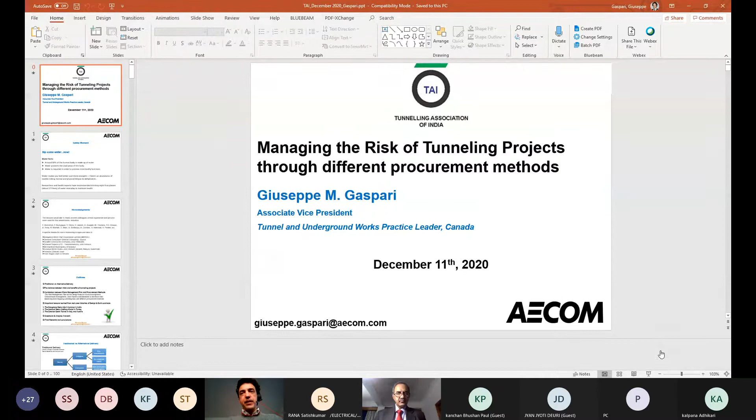Hello everyone. Here is Giuseppe Gaspari speaking from Canada. Can everybody see my screen first of all? Yes, it's visible, sir. Perfect. So I'll move to full screen.

First of all, I want to thank the Tunneling Association of India for inviting me, and in particular the president and the vice president, and my good friend Sandeep, who is leading the young members, for inviting me. I want to thank Mr. Devendra very much for still thinking of me as a young member. I am also closer to 40 years older than the threshold limit for young members, but I look young, so I think it is a great compliment. Thanks for that. You're very young. Looking at me, I've already crossed 60. So in fact, you're very young. Thank you.

I would like to get this training session started with the safety moment that is common for us here in North America. My safety moment for today is that of sipping some water, so I'm going to have a glass of water all the way through this workshop. I would gently request that every one of you remember with this safety moment the importance of drinking water. We're now working from home, most of us, all over the world, and sometimes we are so concentrated on our work that we stay at our desk for many hours and forget to sip some water.

Everybody knows how important water is. Our body is made mostly of water, and it makes us feel better, more energetic. Research experts say that 2.5 liters is what we should need every day to maintain our health. So we're going to go through the presentation, and sometimes I'm going to stop and request everybody to sip some water, as I will do as well.

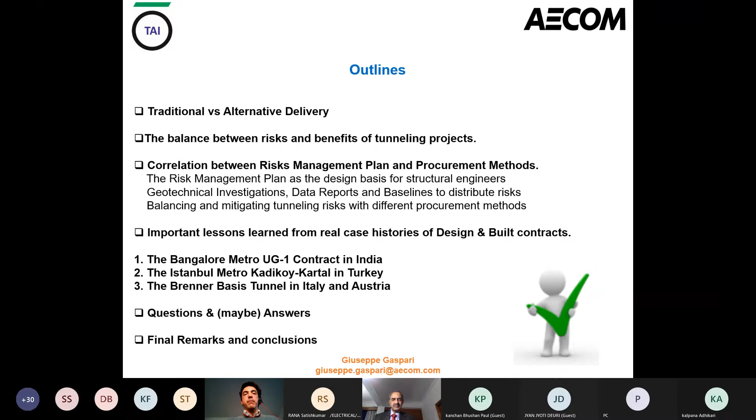I'm going to have some lessons learned from case histories. The case histories you will see through the presentation are coming from the Bangalore Metro Underground Contract 1, which has been completed and is now operational - the north-south line in Bangalore. I will speak about Istanbul Metro, Kadıköy-Kartal, a 30-kilometer long subway on the Asian side of Istanbul, and then about the Brenner Base Tunnel, the longest tunnel in the world, connecting Italy and Austria, currently being built. We're going to have some questions and answers and final remarks.

Now, to get started, let's set a little bit of ground rules here. What we usually globally intend for traditional delivery is the one where the owner of an asset, when deciding to move into a tunneling contract, establishes two different separate types of contracts: one with a designer and one with a contractor. In Europe as well as Asia this is not very popular, but in North America it is, as well as in the UK. The owner has all of the responsibility for the geotechnical investigation and for the preliminary and detailed design, up to the very issue for construction drawings.

This is why the designer that is in direct contact with the owner often has a number of subs, either consultants or those subs developing the geotechnical investigation program. A separate contract, once the design is completed, is then established between the owner and the contractor. The contractor may still have some subcontractor or sub-consultant as designer, but he's the only entity having a contract directly with the owner.

When we move into alternative delivery, we used to speak about different types of forms of contract: design and build, very popular in India, and P3, for example, which are more and more growing everywhere globally, or other alternative deliveries that I'm going to speak about in a little while.

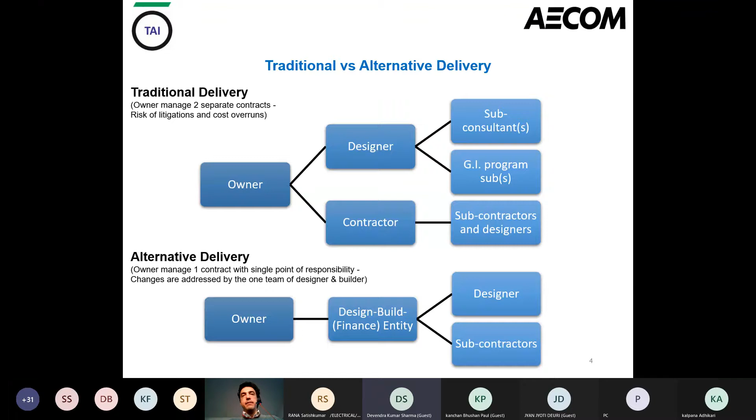This type of relationship is, as you see, easier somehow, more direct, and has a direct relationship between the owner and who builds the asset, which is the design-build, sometimes financing entity. This design-build entity is then constituted by designer or designers and subcontractors specialized in doing other tunneling operations or station constructions, ventilation systems, whatever it's needed. But the one thing that is different between traditional and alternative delivery is this either dual or unique type of contract relationship with different entities designing and building the contract.

Now, what is the difference in terms of schedule within the two methods? We are all acquainted with the design-build method. I myself delivered a few projects in India with the design-build method, and it is quite efficient. It is confirmed globally that we have an average time saving of about 33% and average cost saving of about 6%.

This is because the whole schedule is quite concentrated within an initial quick planning, but then the preliminary and final design take place as the estimation and bid from the contractor participating in the tender phase develops, and the permit acquisition doesn't have to wait for the completion of the final design but will start earlier in the game, so that construction can actually commence about 30% times earlier than what happens with the design-bid-build method.

The design-bid-build method is very popular in some countries in Europe and in North America. It is more linear, and as you see, allows the owner to have full control over the whole process. We have a preliminary design followed by final design, then a cost estimate, then we go out to bid, and the bid is only for construction. Once we have the awarded contractor, he will get the permits done, and finally the selected contractor will go into the site and get the construction done.

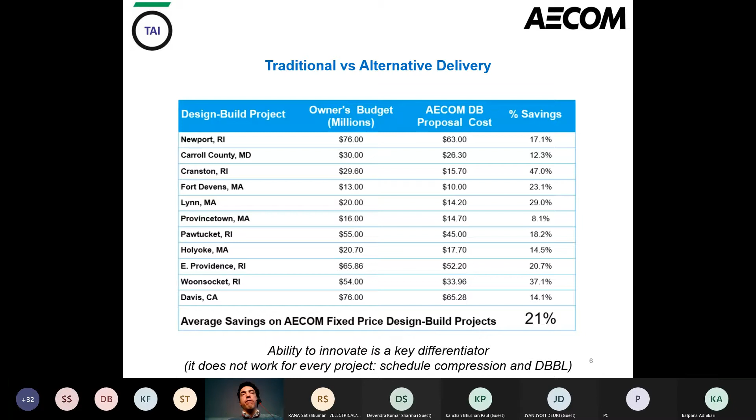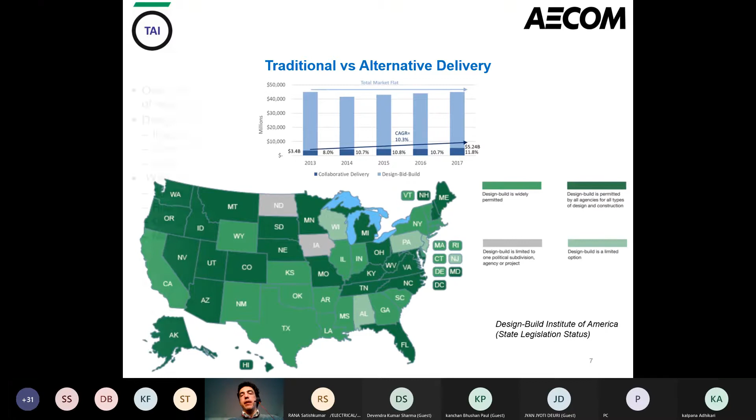Now, what is the advantage here, and why do we move to design and build over design bid build? Really, it's having one contract between the owner and the design builder as a single point of responsibility. And that one point of accountability is what allows the legal framework to be much easier. Now, the design builder can take many forms. We can either have an integrated design build firm with all services in-house, including construction and design, or we can have a joint venture, or we can have a contractor hiring an engineer.

But who is taking the lead here? And that's what is really important to understand, even when we are experiencing design and build contracts, because proven ability to deliver a certain type of project is what really matters. I've seen several times in my lifetime contracts being assigned and being led by entities who were not really experienced in tunneling. When we speak about tunnels, we want to have as the lead the team member who has more experience and more ability to deliver a tunnel, even though it may not be the strongest of the financial partners in the joint venture. And that is a first critical message to deliver in this presentation.

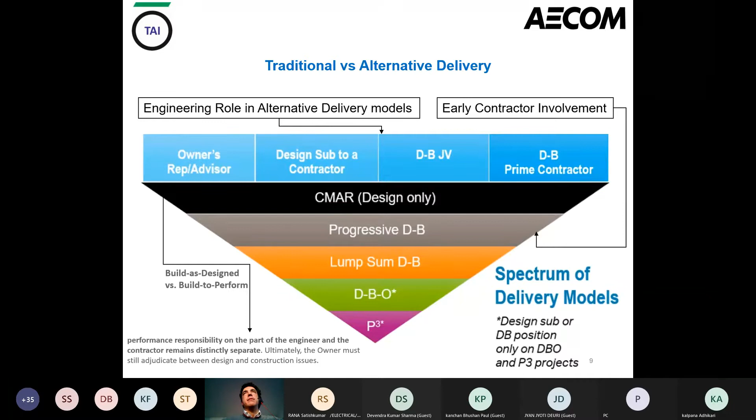So in these cases, we have a direct intervention of the public, partly financing the works, but the private entity will actually have full responsibility of geotechnical investigation, design, construction, maintenance, and operations for an amount of years which is directly proportional to the investment that the public is developing.

Now, I hope this made a little bit more clear the distinguishing of different types of alternative contracts and what really is the reason why we don't move alternative delivery in North America while somewhere else in the world, such as in the Indian area, we have a lot more accomplished with this design form. Well, first of all is the fact that many states, as I say, don't have a proper legislation to allow that. There is also sometimes a lack of ability in selecting the design builder based on qualification and experience, just because there are not many competitors locally, perhaps, that can deliver a tunnel.

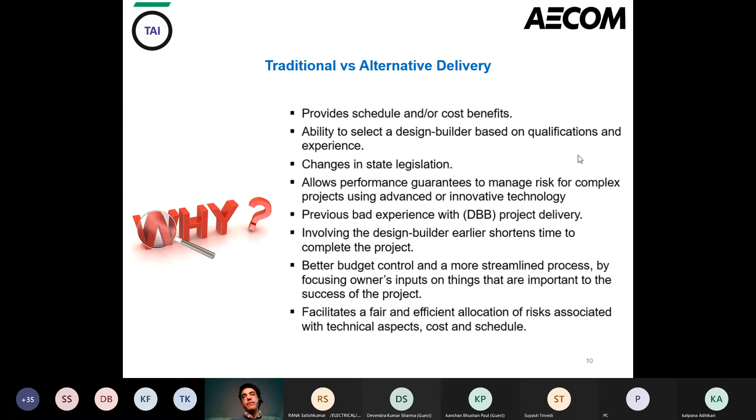And that's why we're seeing, particularly in Canada, a lot of contractors and companies coming from abroad, from Europe, from Asia, coming in and bringing their experiences and qualifications on projects that maybe is the first time that they have been built in such a way in Canada or the US. Now, what is also critical is that the involvement of design and builder earlier kind of shortens the time to complete the project, but also opens to a number of liabilities that very often the owners are not ready to take on.

Now, that's the time for a sip of water. And I wanted to make polls, but we won't have the ability to poll it. So these are mostly polls to just think about.

And first of all, I wanted to ask you, how do you quantify your involvement in alternative delivery? As you see, different answers were possible. I'm not asking you to answer, but to answer to yourself. But I want to tell you that when I have given this workshop in other countries, there are very few people that really can claim they have delivered more than one alternative delivery project. And I'm sure that in this environment instead, in the Tunnelling Association of India, we have a lot more experience in that. And the second poll was to understand better what is your background. But I'm sure that as every other tunneling association in the world, you have a good understanding from both the private side and the public side.

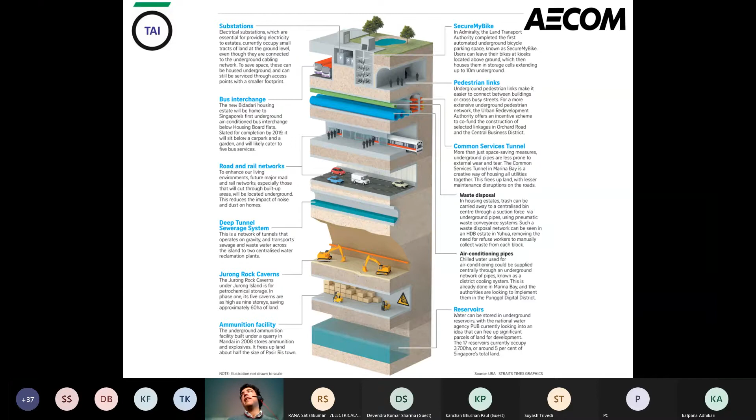We may have caverns for either working facilities or industrial facilities, in order to shorten the distance between residents that are on the surface and workplaces, which may actually happen underground. And then finally, reservoirs. We all know how important water is and how important water will be. So many cities are actually creating those reservoirs. I think Singapore is one of those that are creating underground reservoirs for water. And these are done by tunneling methods most often. And that's when we come in the picture to find those solutions for our growing cities.

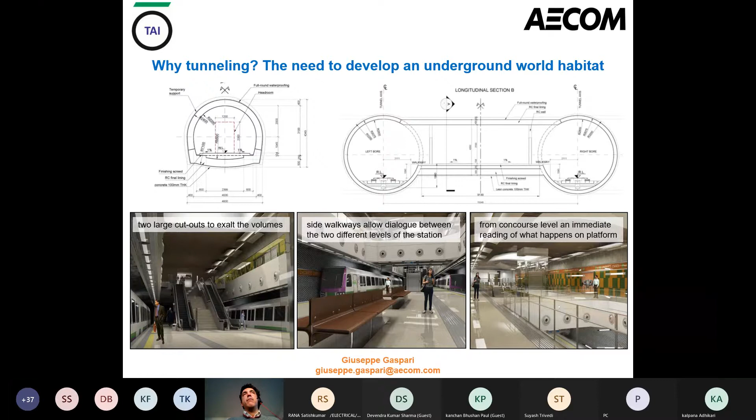Now, the need to develop an underground world habitat definitely requires us to look after how to make these more livable. And again, those examples are coming from the Bangalore Metro, where large cutouts were created in the stations, and side walkways along the stations were needed in order to allow people to easily manage the underground space. There is no light, there is no sun, and we need to recreate that type of effect of being overground to make people more comfortable in using underground space. That was the first underground subway in Bangalore, and many people would have never actually felt comfortable going underground. And this is important to consider also. What is the social impact of our asset, and how we can make it comfortable if they've never been using an underground space before.

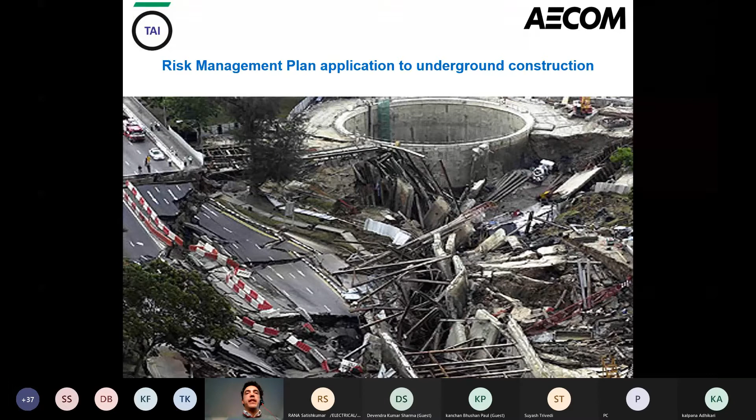Quite interesting project indeed. Now, it is all good speaking about the advantages of underground, but we also must consider the risks of going underground. You probably remember this example from Singapore, the Nicoll Highway disaster. That is one of the examples where poor geotechnical engineering and tunneling engineering, as well as construction issues, may create damage and endanger the life of people. And we don't want this to happen.

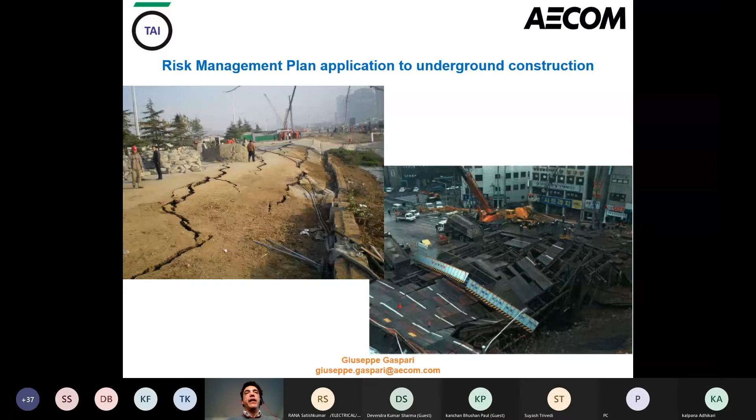First of all, on a political legal level, we need organization and governance. We know projects may stop as political interest stops on those projects. And that's why we need to be able to mitigate them when we consult with the owners, when we consult with the government, to understand what is critical to limit those risks. What do we need to have in the ground early in the game to avoid that a new political intervention in future may stop the project just because the interest is less?

Then we have supplier power. Now, this is mostly speaking to the procurement method, and is the fight between the contractor and the owner, or between the designer and the contractor, in order to try to have more power within the game. And this is a major risk that also needs to be accommodated.

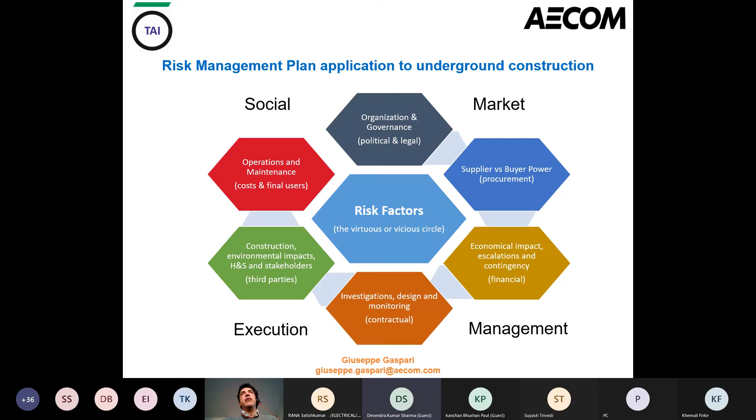And then we can move more into the execution phase, where we have investigation, design, and monitoring. This is more typical for us to work on. This is on a contractual basis, as well as what are the impacts on the environment, the health and safety, and the stakeholders. But finally, what we need to consider is the social quadrant of those risks. So during the operation and maintenance, what will be the cost? What will be the final user understanding of the underground space? And that is something that also creates some risks.

Now, we can definitely manage the risks. We can reduce the probability and the impact of those risks to reduce the overall risk impact, but we cannot deny that some of those risks may always exist. And actually, all of them will always exist. We can only try to control them better. And by moving into alternative delivery methods, this is very much on the designer and the contractor, while staying on the traditional delivery method, this is more on the owner side. And let's see why. It is all about the type of design.

When we are on what we call the traditional design-bid-build, the design is very prescriptive. Most often the owner goes as deep as detail as the issue for construction drawings. But moving towards a design-build approach, and even a public-private partnership, there is a shifting of risks from the owner towards the contractors, because there is an increasing complexity, an increasing number of stakeholders and interactions that requires the private financing and a private exposure towards the risk.

But this also opens to innovations, to new ideas, to the application of cutting-edge technologies that an owner which is risk averse will never allow due to the risk tolerance they need to respect. But a contractor and a private entity more open to gain value out of a contract may be actually more interested in implementing new technologies and approaches.

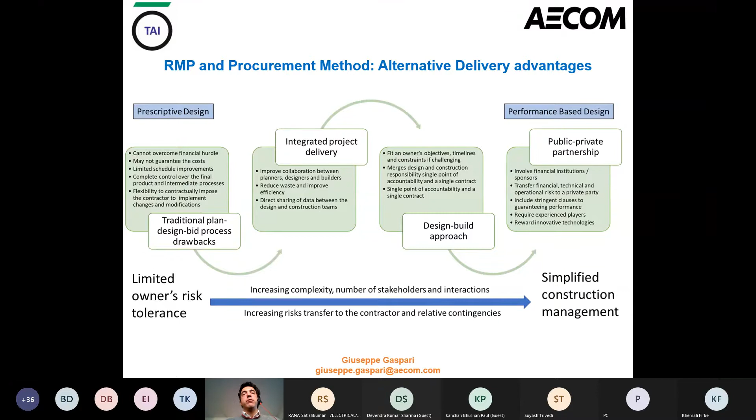What is critical at this point is really mentioning the observational method. We used to design our tunnels predicting, with our design analysis, what will be the behavior of the ground and the soil-structure interaction underground. Then we monitor what happens on the underground structure to make sure we are doing a good design and the construction is safe.

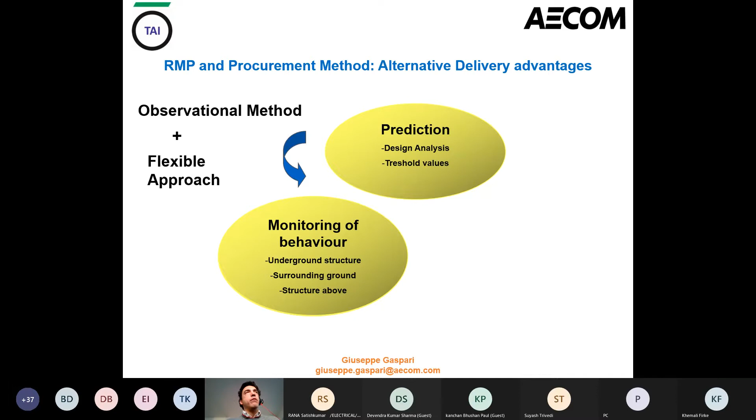But this is not enough. Not only the underground structure, the tunnel, needs to be monitored, but also the surrounding ground and the structures above, the utilities, the buildings over the ground. So we really need to move into a flexible approach where not just we observe, but we modify the design, and we are able to apply predefined countermeasures to limit our possible damage on the surrounding areas under threshold values.

Now, this is not even enough. We often need to develop a program for advancement of tunnel, which is really the one that allows not only applying predefined countermeasures, but adapting them. The digitalization of our processes allows this constant understanding of what is happening in the ground, and what could be the best means and methods to adapt our construction to the real conditions we find on site. This flexible approach, plus the program of advancement of tunnel, together with the observational method, are what really are the foundations of our full risk management plan.

Having defined that, let's move into an example of how this applies on a public-private partnership example. You see the public owner is up there and will be the final owner of our underground asset, like BMRCL or DMRCL, the public entity.

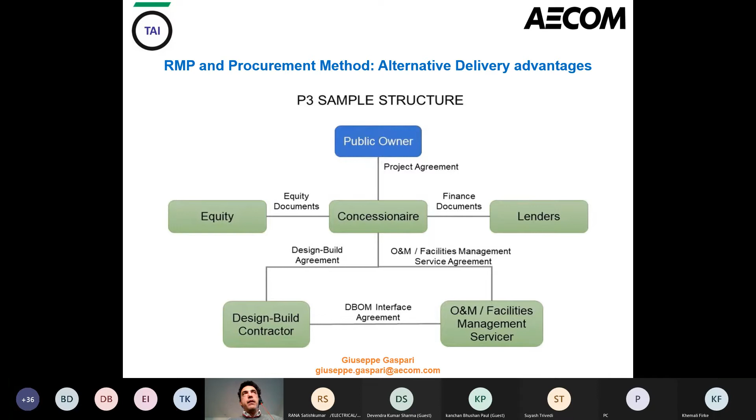So what they often do in Europe and North America is hiring a concessionaire. The concessionaire is an entity constituted by the design-build contractor, but also the operation and maintenance and the facility management services, as you see below there. The concessionaire needs to fund themselves for the years they need to build the project and maintain and operate it, because between construction and the time they start getting revenues, they are exposed financially. That's why equity partners are necessary, as well as lenders like banks, to give them the money to build this up at the beginning.

The typical construction period is maybe 4 to 5 years, and then the maintenance period maybe 20 years. After that time, well, they usually get back to the public authority. This is an example coming from the I-75 highway project that we're working on right now.

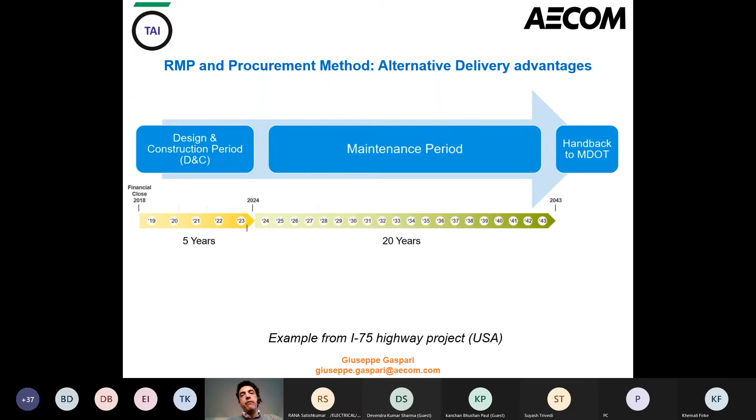Now, what happens in the first 5 years is that you may have some intermediate milestones, because the government is also interested in having the project done sooner rather than later. So they may pay a portion of your construction cost in order to reduce the exposure of the design-builder towards the lenders of money, and then reducing the interest on the payback being requested. This will translate into, over the 20 years of maintenance period, a reduced fee for the users, for the public people, for the people that have to use that asset.

But really what comes to the public-private entity, the concessionaire, is the initial milestone payments, which maybe cover less than 30 to 40% of the total value of the contract, and then the fees from the use of that asset. This happens for bridges, for tunnels, connecting underground sections, but also for non-transportation assets such as water tunnels. This case of the I-75 has the highway, but also an underground tunnel which reduces flooding to the highway. A value is given to the fact that there will be less risk for the users of this highway, because they will not risk getting their car into a flooded highway one day.

Now, the risk is very important, because when we determine the risk of a tunnel, then we need to approach the financial institutions.

We need to approach the banks and the equity shareholders and ask them what will be your interest rate when we ask you for money. Look at Michigan State and the case of the I-75, rated by Standard and Poor's. The rating agency put it at AA, which is a good rating, so a very small interest rate if they decide to borrow money from the market.

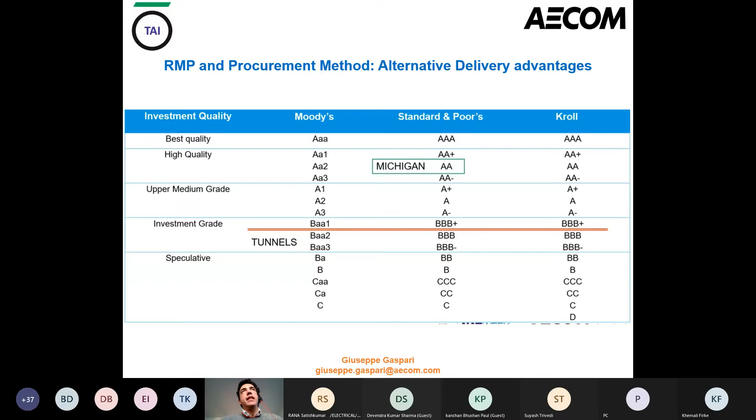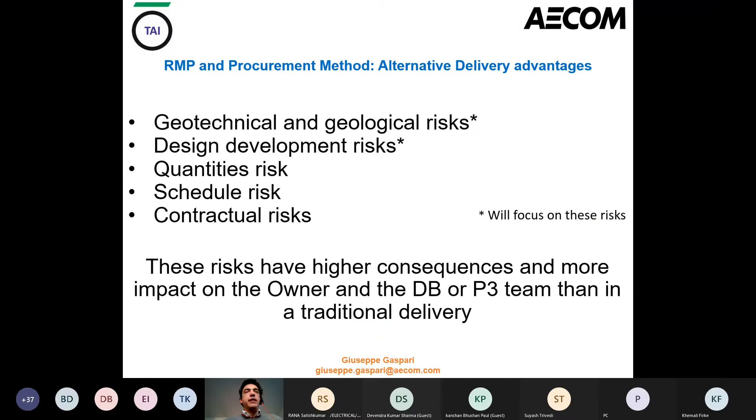That's where we come in the picture, and we need to try to reduce and convince them of reduced risks. That's why we need to identify those risks properly: geotechnical, geological, design development, quantities, schedule, and contractual risk. Let's focus on the first one.

But first of all, let's get another sip of water.

Let's think about which of those risks is actually the most important for a tunneling project.

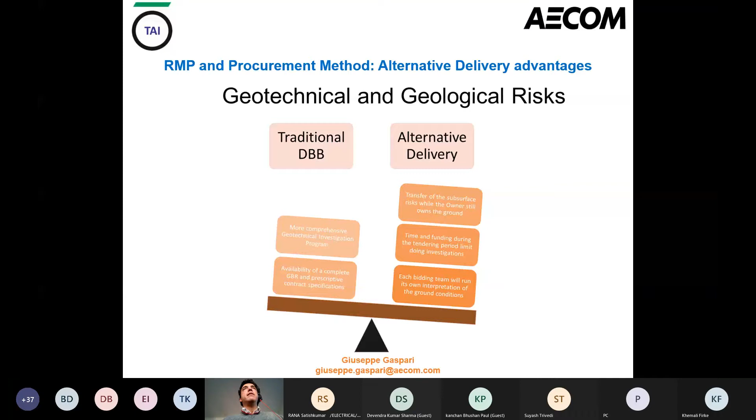When we look at geotechnical and geological risk, we need to remember they are a little unbalanced toward alternative delivery, because in design and build, this is very much on the contractor side - they need to take on all the risk for the geotechnical investigation. The traditional DBB instead has more time to develop the geotechnical investigation, but this translates into a longer schedule for construction.

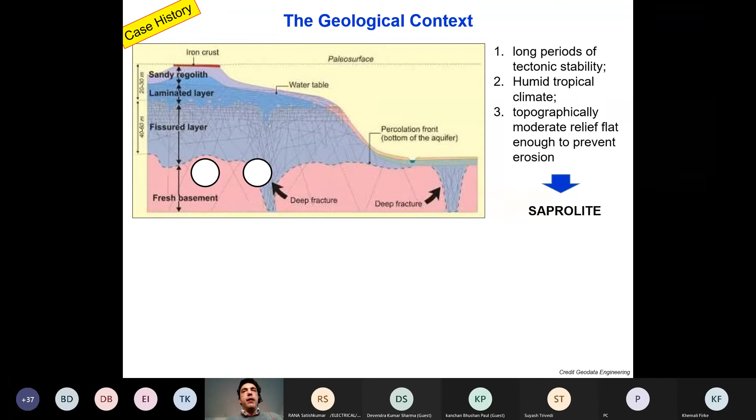Let's look at this case history. We're looking at a saprolite formation subject to long periods of tectonic stability - the typical situation in the Deccan, in the Bangalore area, for example, where the surface is characterized by topographically moderate erosion elements, and the bottom ground is a granitic bedrock intruded by a number of basic dikes.

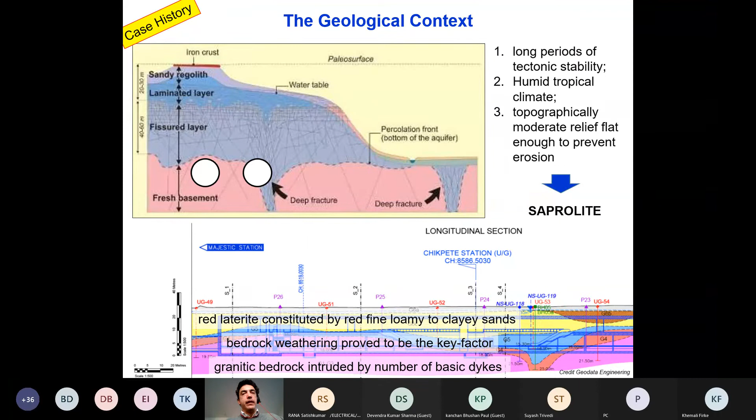The red laterite on top is usually not found by tunneling. The tunneling we usually have is in the middle area, where bedrock weathering proved to be the key factor for tunneling conditions. That's what happened in Bangalore - the selection of the machine was critical for that reason.

Here's an example of how we selected the machine at the time. The disc cutters were dimensioned to be able to cut boulders in soft soil, but also to excavate properly in rock. The granite of Bangalore is one of the hardest rocks I've drilled through in my experience, after the Brenner base tunnel granite, definitely.

It was important for us to select an earth pressure balance type machine because of closed mode. When we move into soil underwater, we definitely want to be able to move in closed mode and not open mode, even though we may have the risk of finding rock sections and boulders at times.

Now, this was not enough. As some of you may remember, an emergency shaft was requested at a certain point because a boulder was encountered, which scraped away from the cutter head of the machine all of the disc cutters, and the cutterhead needed to be substituted as well.

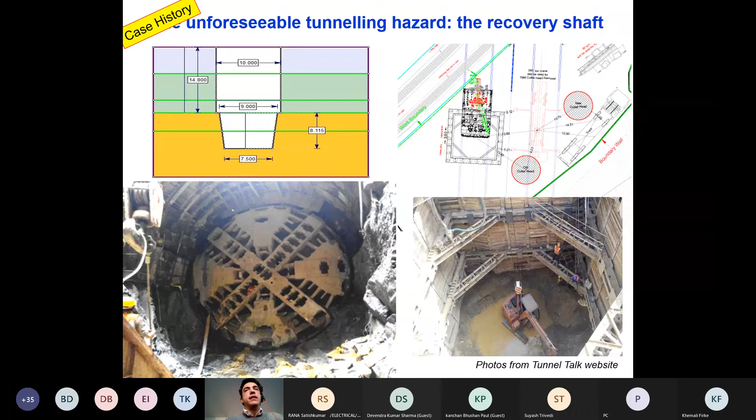This is one example of having the right geological information and having this risk on the contract, with the contractor being responsible to find any possible solution to get the contract running again. The emergency shaft was excavated very close to an existing railway, the cutterhead was substituted, and tunneling restarted, all at the cost of the contractor. There was no possibility of claiming anything from the owner, because the owner was not responsible for this geotechnical investigation program - that's what design and build means, and that's why we need to convince the industry we are capable of handling even the worst case situation, finding the right solution, and getting work going again.

And this is an example of when this was recovered.

Another case, also from the Bangalore station example: here the goal was to identify exactly those rock levels. An extensive campaign of probe drilling was enough to understand where the rock would be found, and you can understand the impact of having the rock higher or lower, accordingly with the need for secant piles, as you see in this case, protecting and supporting the excavation.

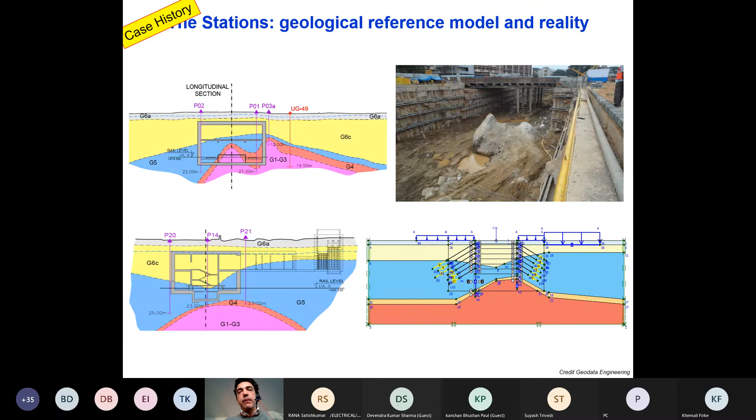Now, where do you end your secant pile? Definitely you want to embed this in rock. That's why the level of rock is so important, and that's why having those probe drillings ahead of time was critical. It proved successful because the geological profile actually identified where that dike really was, and allowed us to make a proper design, shown on the bottom right, with tiebacks all the way through. This was very interesting.

Another example from the same project, speaking about the same risks, comes from the station. The water table was considered to be a couple of meters below ground at Chikpete station. However, when we demolished all the buildings above the area where the station would come in, we noticed the water table actually increased. This was because the houses had shafts that were sucking water from the ground, keeping the water table lower. But when we went to build it, the water table increased, and we needed to adapt and change our design. That's what I told you before about risk mitigation and flexible approaches - to monitor what's on site and be able to adapt our design.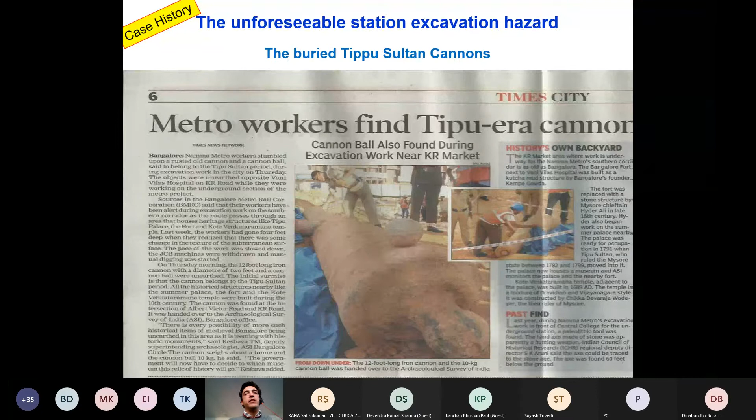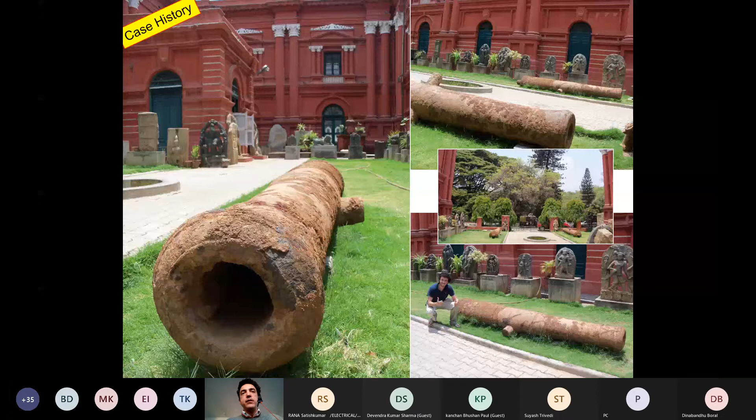Some situations are very difficult to predict, such as finding an ancient cannon from the Tipu era at one station. You may have identified every geological and geotechnical risk, but forgotten to read some history books. Remember, Sultan Tipu was moving cannons underground in a secret tunnel from the Tipu fort to the Tipu palace. This was exciting because we found that cannon, and we are now exhibiting it in the Museum of Bangalore - you see me there, much younger, 10 years ago. The idea is, some risks cannot really be predicted, but that's when your design and flexibility come into the picture, to make sure you have a solution to recover an asset like this one and save it.

A successful underground project comes from understanding the geology, but also from having experienced tunnel personnel around. That's when everybody working as a team brings success into the picture.

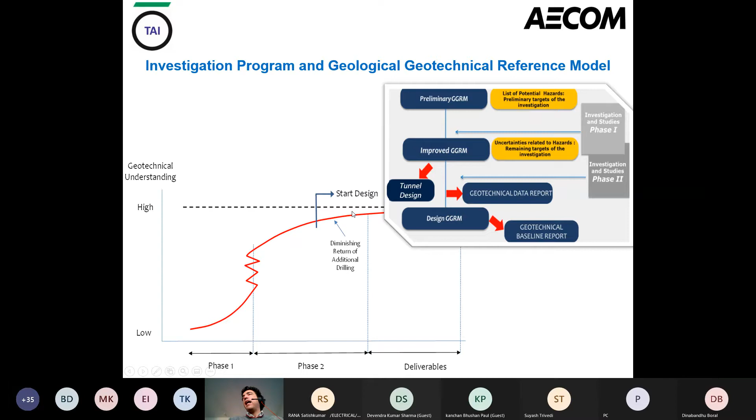This graph is very interesting because in a contracting arrangement, you usually have a higher initial spend for geological investigation, which allows you to reduce overall cost - but only up to a certain limit. As you'll notice, increasing data acquisition beyond a certain point doesn't translate directly into reduced total cost, because it doesn't really address the project's risks. That's why building an investigation program that progressively increases information, while transforming that information into value-added design elements, is critical. At a certain point, the red curve approaches a horizontal asymptote, meaning we don't gain as much additional information as we would need.

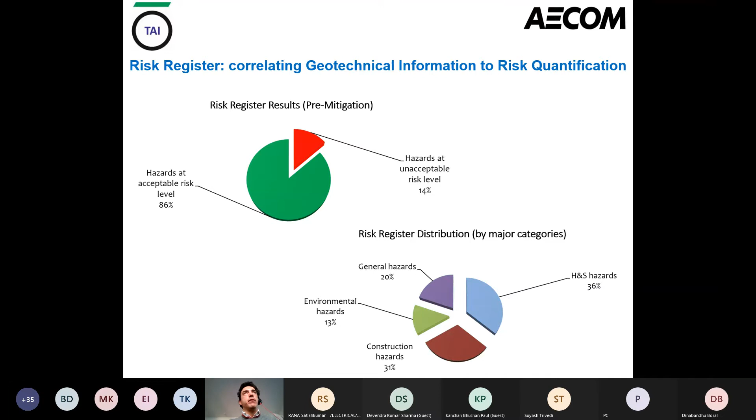So it's critical to identify risks and divide them into those related to hazards under an acceptable risk level, and those that are not acceptable, then focus on that red portion. This is an example from one of my projects, where the unacceptable risks are usually less, maybe 14%, like in this case. Then you divide them - what are these 14% unacceptable risk levels? Maybe health and safety hazards, general hazards, or environmental construction hazards. That's when we come in and try to identify and mitigate only those hazards, setting aside the others that are under acceptable risk, so we focus our geotechnical investigation more efficiently where we really need it.

Let's look at an example from North America. We have a number of variable geologies, with a base rock in this case being the Georgian Bay Formation or Queenston Formation. You'll notice this is a shale, subhorizontally bedded. It has been subject to massive weight from the ice - 1,000 meters of ice on top compressed this rock in the past and created locked-in forces horizontally, which are now very risky. It's horizontally bedded for one reason: because it cannot crack in the vertical direction. These locked-in forces come from the memory of that huge pressure from the ice. On top of that, layers of glacial till accumulated as the ice moved from the north.

These actually created the most risk because in this glacial till we may find boulders, nested cobbles, sandy pockets, and that's when we move into tunnels maybe the highest risk. But when we hit the rock, well, we have to expect fault zones as well, and we have to expect those locked-in forces to trigger what we call shale swelling, which is a time-dependent deformation that happens with time.

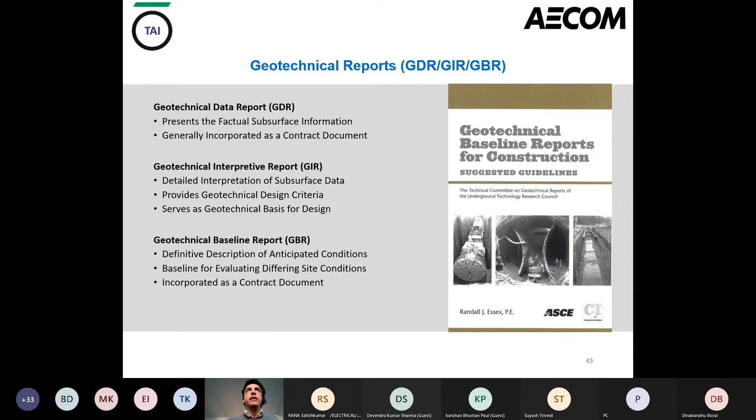So those type of risks should be very clear to us when we work in a geotechnical baseline report type of environment. Introducing the geotechnical baseline report was very important for the American Society of Civil Engineers, because it really allowed us to define exactly those risks I mentioned before, in an early stage of the project.

This definition of the risks allows us to understand what is the baseline for the contractor to bid on. So the contractor is not bidding for all of the risks possible that I mentioned before, but only for those that are identified early in the game by the owner and for which the owner is open to pay for.

Everything above that level, if you find unprecedented or unexpected geological conditions, or a boulder that you didn't account for, well, this is something that the contractor is not responsible for, because the contractor is only requested to quantify and cost the amount of geotechnical and geological information included in the geotechnical baseline report.

Don't get confused by the name. The Geotechnical Baseline Report does not include all of the information you need for design. This is still up to us, as designer and contractor, to describe the parameters we want to design our tunnel for. The Geotechnical Baseline Report is a contractual document.

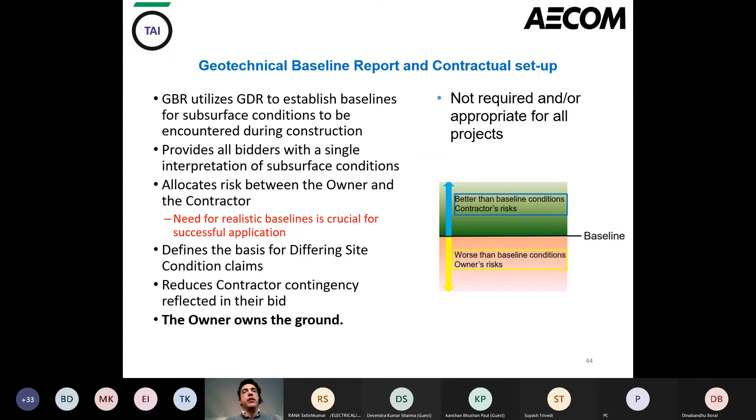It gets into the contract and defines the major risks for the tunnel, in order to reduce the exposure of the contractor when unexpected conditions are found. That's what kind of balances again the development risk during the design.

Still on the alternative delivery side, still on the design and build, it's more risky because they have to take on themselves the selection of the parameters, even though a GBR may exist in the background.

This is an example coming from Istanbul Metro. Speaking to the design risk, it tells you about the cut and cover structure, which was originally intended to be excavated across one of the major highways in the country, very, very crowded. Stopping the highway in one direction would have been massively critical for the economy of the area. That's why the tender project had a large expropriation and a large cut and cover structure, which would have stopped this motorway.

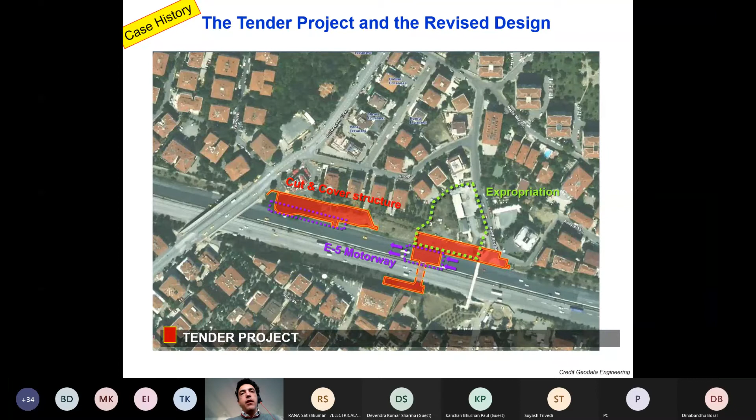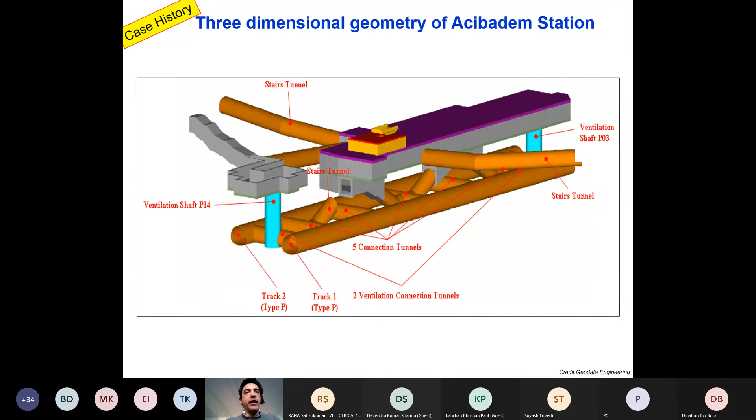Looking at a three-dimensional understanding of the station and all of the interfaces behind it allowed us to look at the possibility of switching a cut and cover upper level of the station from the rest. And the revised project looks something like that.

You see, there is no more need to stop the motorway or intercept the water pipeline, because we were going to have a mined cavern underground and a disconnected cut and cover section just to connect to the surface in the expropriation area. We connected on the other side of the highway through an overground walkway.

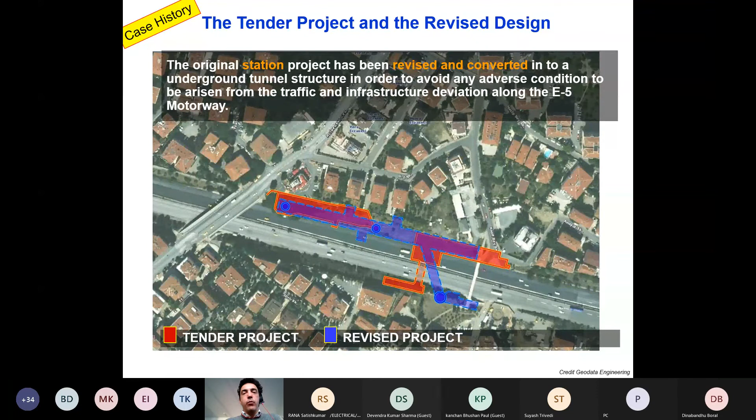These are the two footprints. Compare one to the other to understand how the design changed, and how a design and build approach is capable of doing this improvement from the tender stage to the execution phase, which allows value added for everybody, including for the owner. This is how the motorway would look, and that's the station on the other side.

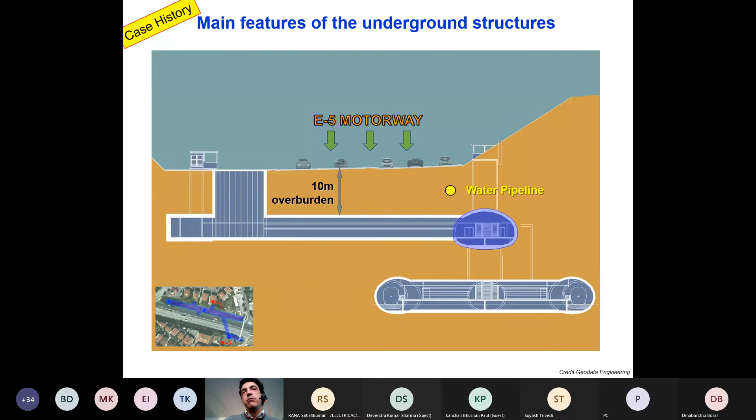This is the tunnel level, and that's the station concourse level, done with mined methodologies, SEM construction. That's how it would look: the motorway in the middle, the shaft access on the left-hand side, and the station on the right-hand side, without interrupting traffic at all on the motorway. The water pipeline was safe as well.

Another example of how design and build can reduce risk is on this TBM example from Bangalore. Now, the starting of the TBM is quite standard. We have a shuttering pipe, we have a sealant ring, and we have the possibility of pushing the TBM into that.

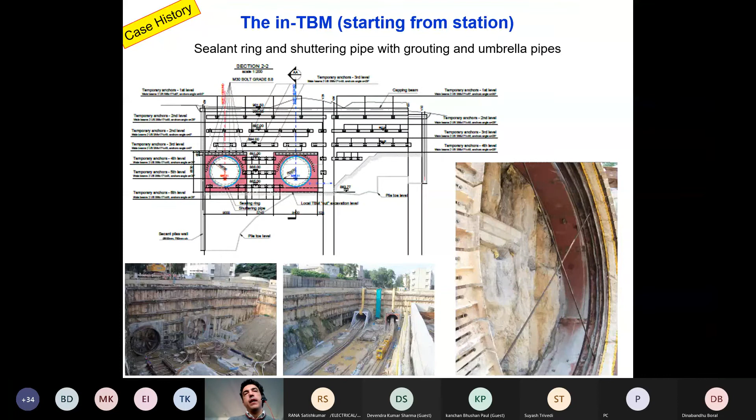Now, the sealant ring saves the construction from possibility of water inflows. But what about when we have to receive the TBM on the other side of the tunnel? Well, starting the TBM is quite standard, and you may notice from this case, we didn't have major problems.

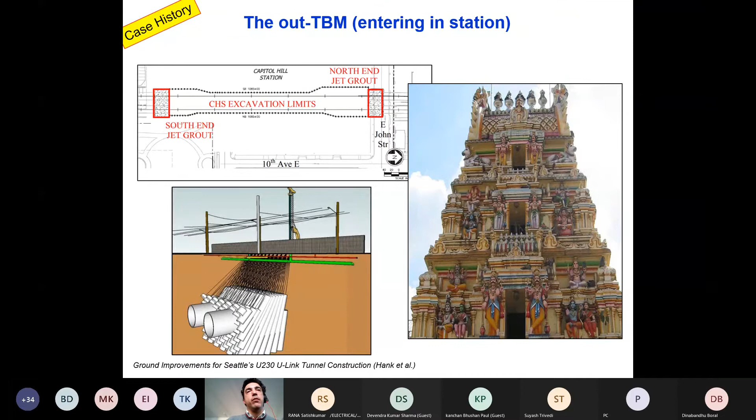This is the cross-section of the station, and the solution we found was that of creating a block of concrete inside the station, because it was not possible to create a jet grouting outside of the station to preserve the temple. The block was long, at least a TBM shield plus two additional rings, in order to avoid water inflow from generating.

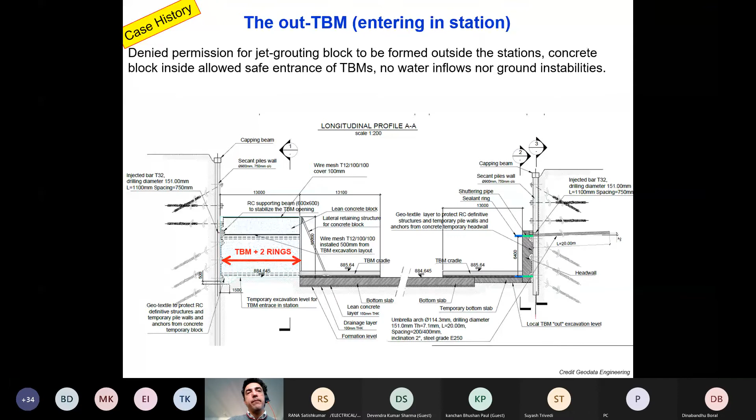It was dimensioned to avoid the TBM thrust pushing the block into the station, thus avoiding any risk of water inflow when the TBM would come in. In the cross section, you may notice the block in blue, and it was dimensioned to resist the water pressure generated between the shield and the concrete itself. Those water pressures transform into tension forces, which were covered by the use of steel rebars in that area.

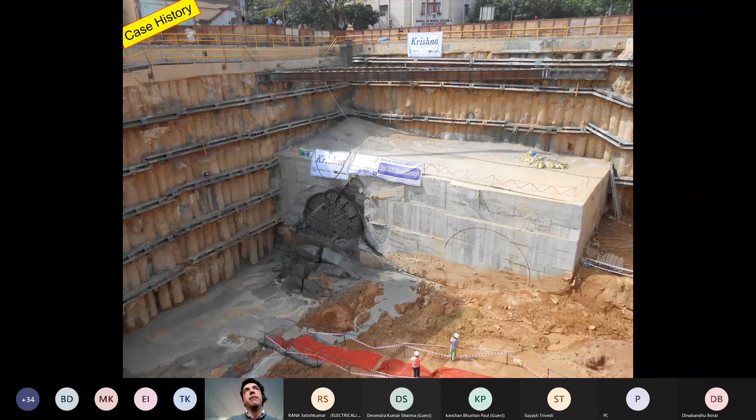The water stops coming in because we actually achieved the sealing between the segmental lining, the bicomponent grout injected between the segmental lining and the ground, and the concrete outside. And with our gasket, we have no more issues.

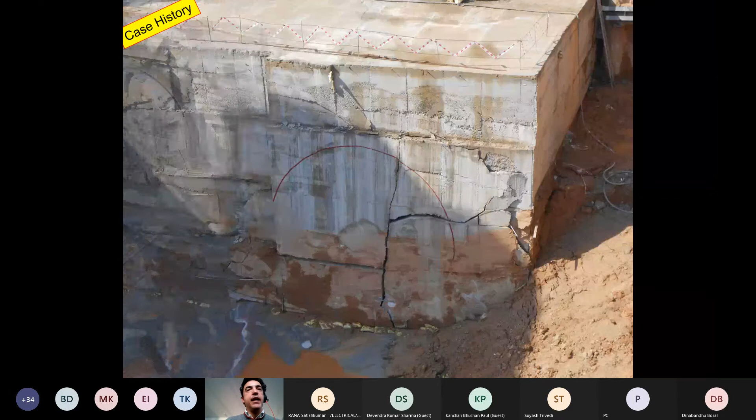You may see here it was quite an intense work to be done, but that's why you need to dimension this concrete block with a low grade type of concrete. An M15 would be enough, so that it resists in the short term but is easy to demolish. The demolition took place, and then it finally was cleared out.

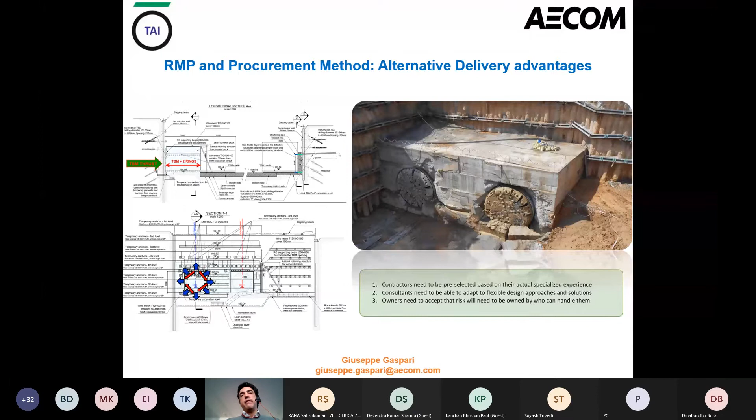So this tells us that really the risk management plan is affected by the procurement method, giving the contractor the freedom to make their choices on site and apply them, allowing them to deliver innovative solutions. In this case, it was quite new, and at the same time succeeded in respecting the construction schedule, even in challenging times. So that's the strategy of success: moving from input data into the underground design, monitoring the conditions, and then design optimizations.

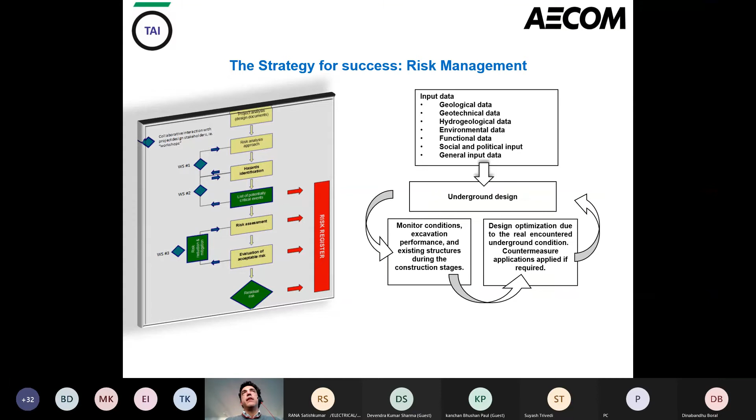Design optimizations that are flexible enough to respond to our risks on site, and that translates into different matrices for tolerance criteria. I've prepared a couple of papers on that, which I would suggest you read.

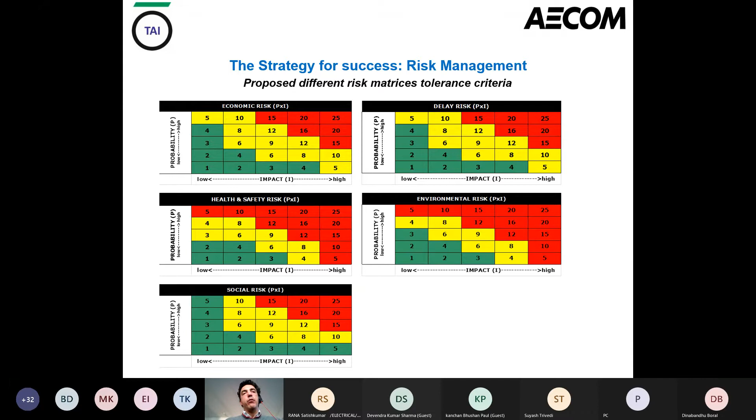And if you want to be in contact with me, I can provide you with them. But the risk matrices really need to be modified according to the risk exposure of the owner and the contractor on the environmental side, on the construction side, on the social risk and health and safety as well. Every matrix is different as we approach different types of risks in different risk tolerance scenarios.

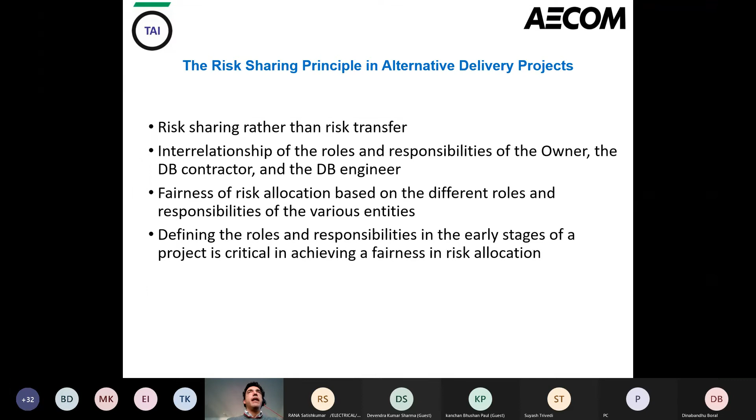The strategy of success is definitely that of risk managing all of the risks, but also understanding how the geological and geotechnical aspects may affect our construction. Alternative delivery projects allow for the risk sharing principle between design-build, engineer and design-build, and the owners themselves, so that everybody is aware of what risks they have to take on and how to quantify them in money value.

That's why along a project life cycle, we need to look after the business case stage, the conceptual design, through testing and commissioning, and final utilization. But the detailed design and construction stage is the one in which we really can quantify the risk for the owner and for the contractor as well.

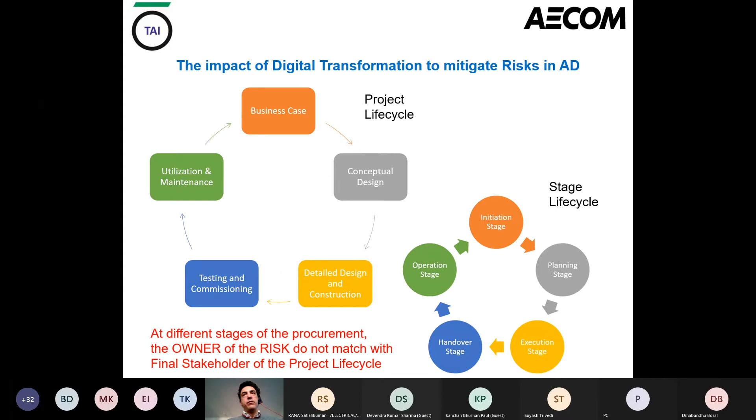I think I'm almost on top of the hour here because I'm looking, we're already a lot into that. Let me try to focus on the last few concepts here.

The digital delivery is critical because it's what allows us a full-time monitoring of all of the situation on site and an ability of addressing any problem on site and resolving them quickly. That was my third sip of water and my poll #4 on how you deal with digital delivery.

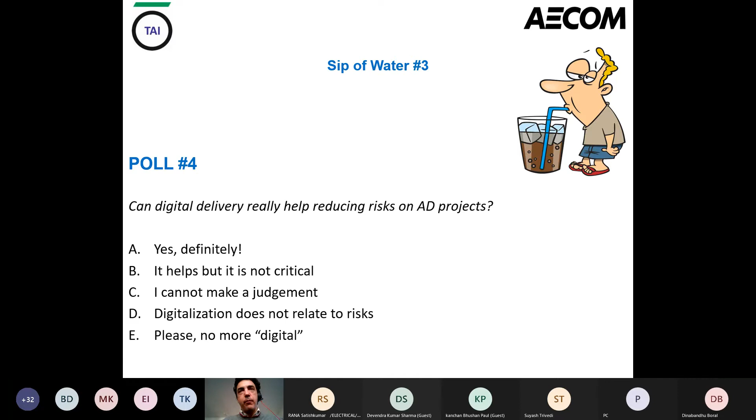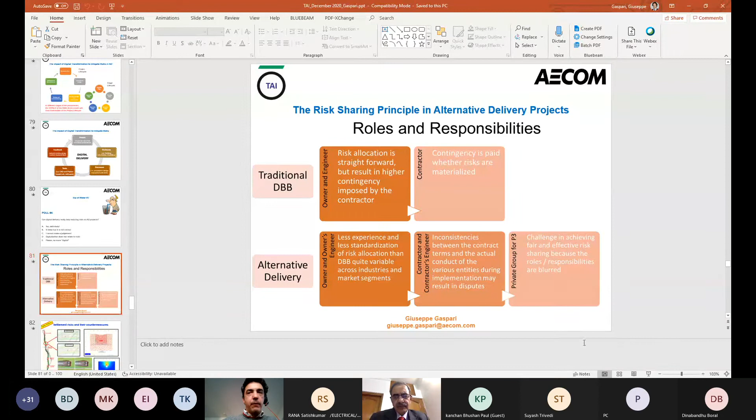And if you're really following the digital transformation across your companies, I would like to see if I have more time. Can anybody from the organizing committee tell me how much time do I have left to get a couple of more concepts through? Guys, how much time do I still have? I understand we can continue for about 15 minutes more, then we can have question answer session of 15 minutes. That's perfect then, because I'll wrap it up because we started a little bit later. I want to wrap it up with just one more case history. I was having not many slides yet, so I'll just wrap it up with these responsibilities. Maybe 15 to 20 minutes. You can continue with your presentation, and subsequent to that we can have question answer session. That's perfect. Thanks a lot. I'll be on time. Perfect.

So I want to deliver this one more concept, and I have a couple of more examples. But it's critical to understand roles and responsibility of the contractor and the owners and the engineers. Traditional DBB, what we call traditional in the United States, which is the one that allows full geotechnical and design responsibility on the owner, is quite clear. You see, there is a clear definition, 2 boxes only. Owners and engineers are responsible for risk on geological side and for the design. Contractor is responsible only on the contingency.

So the idea here is the contractor has a problem on site. It is his fault as far as the means and methods he adopted were wrong. But if he respected the design and the geological constraints from the owner and the engineer, well, this is not his responsibility. On alternative delivery it is a lot more complex.

There are 3 cells here which are kind of identifying to you a gray area in between an understanding of the geological conditions at the beginning, at the bid stage, and what are instead responsibility later on from the owner's side. It is quite complex and not often allows avoidance of claims. You know that in design and build, we are often dealing with claims and issues like that, which on a design bid build instead do not exist because it's a more clear definition of risks distribution.

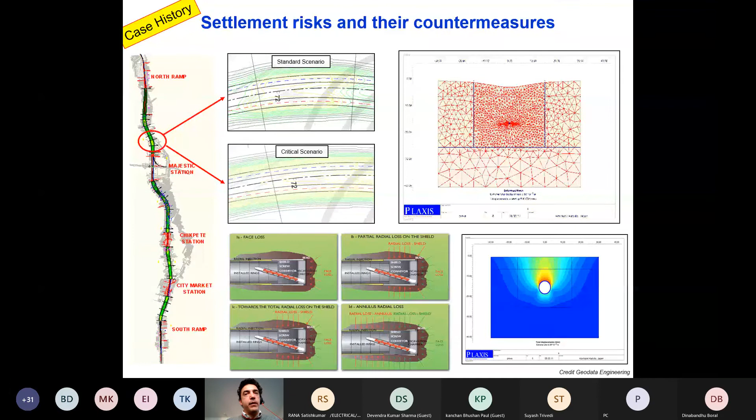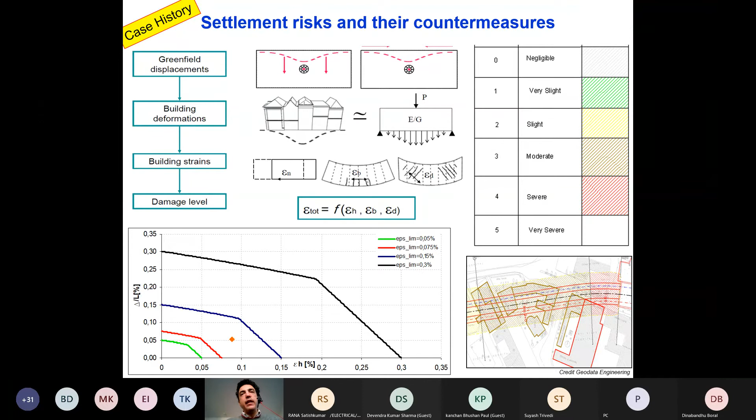But what I discovered also was the importance of the religious respect of the area. A temple cannot be just shut down. And I learned my lessons when I was working on this project. And what I needed to do in that case was trying to find a way to keep the temple accessible and to keep the religious events open by simply having a strategy towards the health and safety of users of the facility. So alternative temporary door entrances were created to avoid the main door.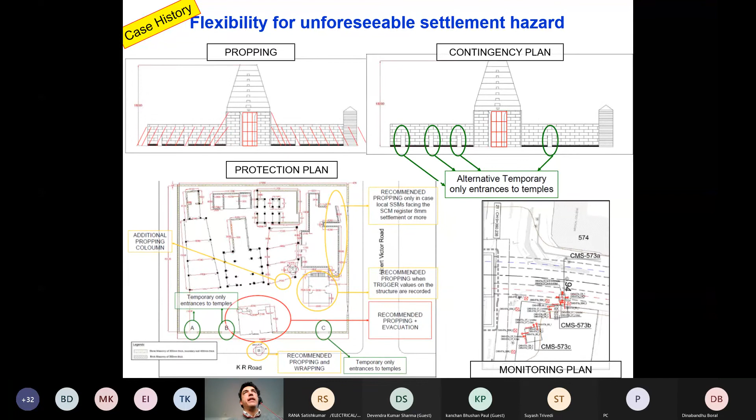Propping sections were done, and an intense monitoring strategy and plan was created, with alarms and sounds being generated in case we overpass some threshold values. The temple was protected and it was quite safe. However, one of the risks that I want to highlight is that not often are we so lucky.

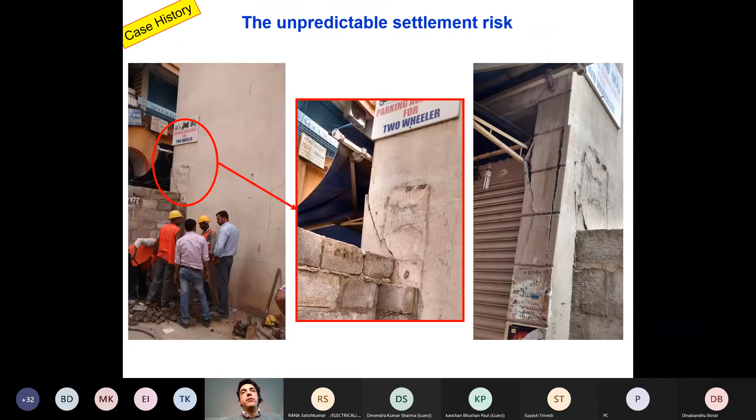Sometimes we see damages such as those ones, and those are typical from settlements happening under the foundation of a building, which induce those shear cracks on corners of buildings. And we have to check all the time what happens in the ground. We need to check if the gap between the tunnel and the ground is properly filled. And not only would I suggest to check the pressure. You see in this case, the pressure was quite good.

We were injecting the bicomponent grout at the right pressure on the tail skin, but the flow rate was almost zero. So this means that we really were having some stuck hoses, not enough flow to get into the tail skin, and this meant that we were not actually injecting the bicomponent grout, and maybe this was the reason why we were creating additional settlements and possible impact on the buildings around that.

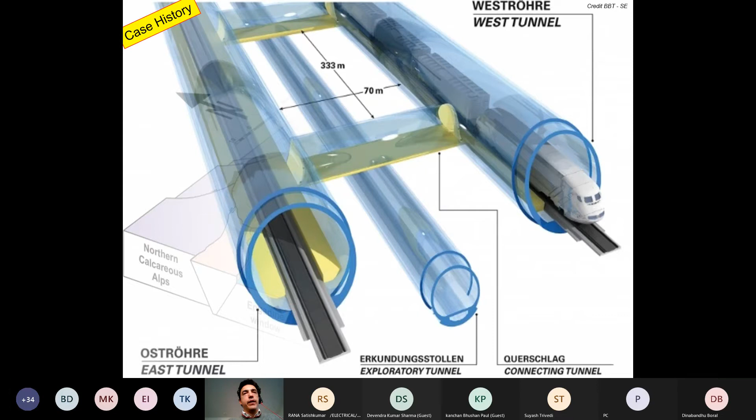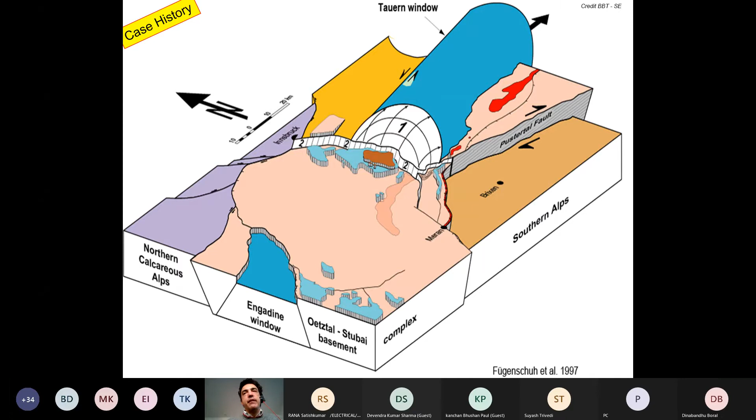When we looked at the Brenner Base Tunnel, we looked at a twin tunnel with an exploratory tunnel in the middle and cross passages all the way through. The interesting portion of this is that it's fully in rock and excavates through the Periadriatic fault, which is below the Alps between Italy and Austria. And it is a very active fault moving east to west, while our tunnel would go north to south.

Now, when looking at the performances of different types of TBMs, I needed to select what type of machine to use. And we were comparing double shield, open TBM and single shield TBM. Again, this is something that you don't want to prescribe as an owner. You want to leave this to the contractor, because the contractor is the one finally responsible to drive the TBM through such a variable geology, as you may notice in the bottom, up to 2,000 meters of rock on your head. And you want to make sure that the contractor is responsible also for the performances in terms of meters per day they can advance.

So you may notice those curves with different types of uniaxial compressive strength, either below or above 45 MPa. I found out that they were having a completely different behavior. So the double shield TBM is actually always increasing as we increase our RME value. You know, this is Bieniawski's defined rock mass excavability parameter. As we increase that, which means we're getting into a better rock, the double shield is always increasing. But that is not the case for a single shield TBM. The single shield TBM tops up and stays stable. The average rate of advance, the ARA, is actually stable at a certain point.

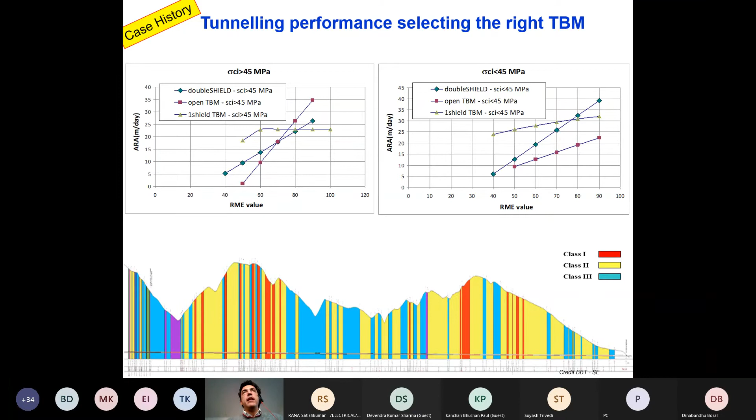And the open TBM is outperforming every shielded TBM, but only if we have strong rocks, if we have uniaxial compressive strength above 45 MPa. Again, this is a case history that I learned, but it speaks to the responsibility of the contractor being the one capable of choosing the right machine, because they have the data of how their machines performed in the past. You as an owner may not have it. And when we work for owners, we need to remember that.

And that is, again, where the responsibility of the owners comes into the picture. So the contractor choosing the right machine to excavate is to be exposed to that selection. But then what about the risk of finding an unexpected fault and putting the workers at risk?

So this is where we really have to be careful, because we expose ourselves to claims, or we have an opportunity for claims, depending on which side we're sitting on. This case ended up with the owner paying for the fact that the TBM was advancing much slower. So they couldn't apply any penalty to the contractor, because it was actually not their fault, and the machine was performing well before the stop, but then they needed to stop because a fault was not identified by the owner in the early geological investigations.

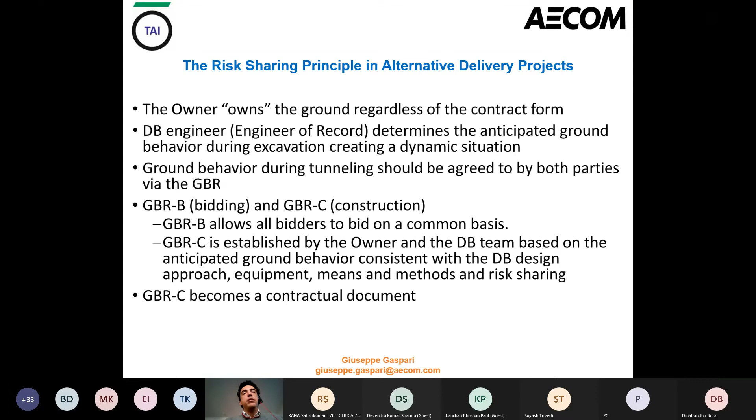A solution may be found by introducing the GBR-B during the bidding phase and the GBR-C during the construction phase. So everybody bids on a slighter amount of geotechnical information included in the Geotechnical Baseline Report B. Once the awarded contractor is selected, then together with the owner, they prepare a GBR-C, which includes more geotechnical information and is agreed and signed off by both, so that the design-build team will not have to claim if they find some unexpected conditions on site, but they can early on in the game agree on a financial closure where more money is allowed to deliver this project. So this is the innovation that has been brought recently, and that I suggest we also follow.

I'm not going to walk you through this losing and winning scenario. More or less it's what I just expressed to you. But I want to have a final remark on successful projects, which are always connected with how we deal with risk management, regardless of the procurement method we're looking at. So how do we balance the geological, geotechnical, structure performance information, and how do we balance instead the supervision, the monitoring, the workmanship ability, the interpretation of the ground? All of what you see on the right side may be less important at the beginning, but is actually as important as what you see on the left-hand side.

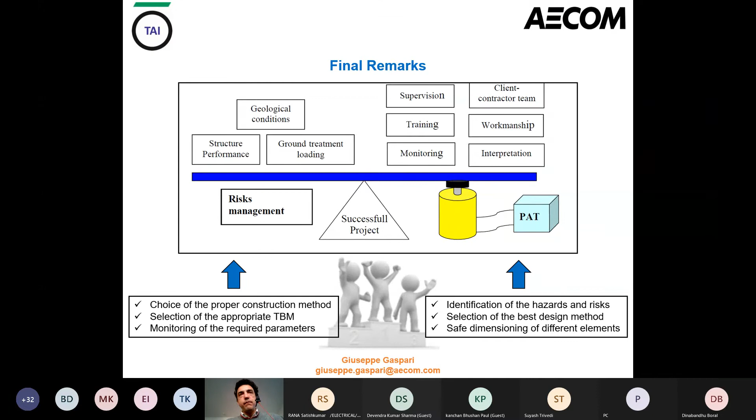Are there any questions? How do we work for questions? Should I read them or? If there are any questions, please raise your hand, and we can address it directly to Mr. Giuseppe Gaspari. Any questions? This is Parikshit. Hello. Yes, hello.

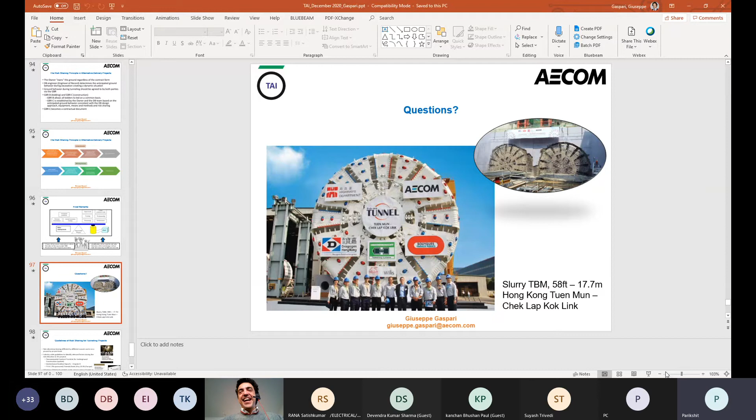I wanted to take your opinion on the Emerald Book. How good is the Emerald Book? I think it's a very good resource. As a matter of fact, you anticipated my next slide, where I was recommending some guidelines for risk sharing. So three books for me are very important. The Recommended Contract Practices, which is by the Society of Tunneling in North America, the GBR, which I mentioned before, from the American Society of Civil Engineers, and the Emerald Book. That is definitely a new resource by FIDIC and the ITA, the International Tunneling Association, sponsored that.

Most of what you have heard today is coming from experience, but is also consistent with what the Emerald Book says. So really, I do agree with what is included, and I do suggest these three readings if you're interested in the subject to inform yourself and prepare yourself.

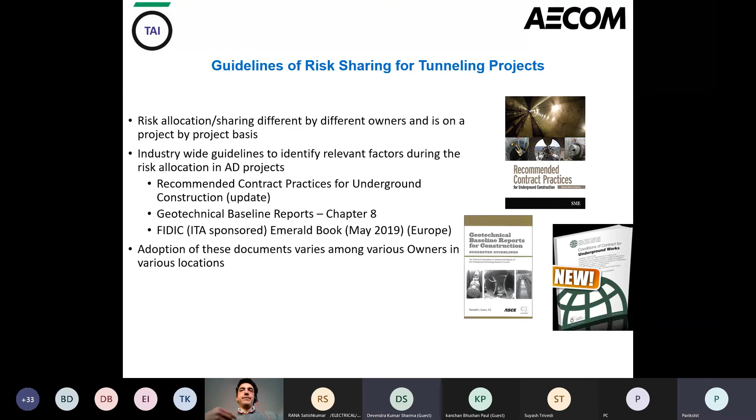I have one more question. We do a lot of tunneling in the Himalayas. Most of them are deep tunnels. And the issue with most of these longer tunnels is that we do not have access for exploration. We actually cannot make these rigs reach those places to give us geotechnical data through geotechnical investigations.

We do a lot of geophysical investigations, but I personally believe they have severe limitations. So how do you think we should go ahead? I want to ask you particularly, do you think we should push monitoring and observation as a practice, because

that is the only way for us to go ahead, have advanced rates, and probably advanced rate matrices, and do tunneling in places like the Himalayas where exploration sometimes isn't possible? This is a very interesting question, thanks for asking. Now let's divide the answer into either a procurement method where the owner designs the tunnel, or a method where the contractor designs the tunnel. So in the first case, the owner-designed tunnel has one great advantage.

Property access may always be easier for a public entity to get. Expropriation is an available tool. Purchasing the property, convincing the owner, political pressure - there are several tools that a public entity can adopt. So for a design-bid-build traditional type of delivery, it's quite easy to access from the surface.

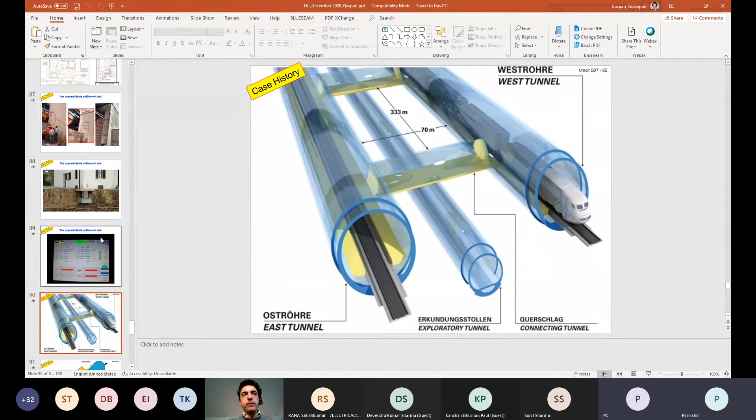Do we actually get, can we, should we depend on that data a lot, especially more than 30 to 40 meters below the surface?

Yeah, when you're in the mountain area, you need to go much deeper, you need to go much larger. But that's when cross-hole information is maybe more useful than geophysics from the surface, right? Yeah, cross-hole or downhole may help you more.

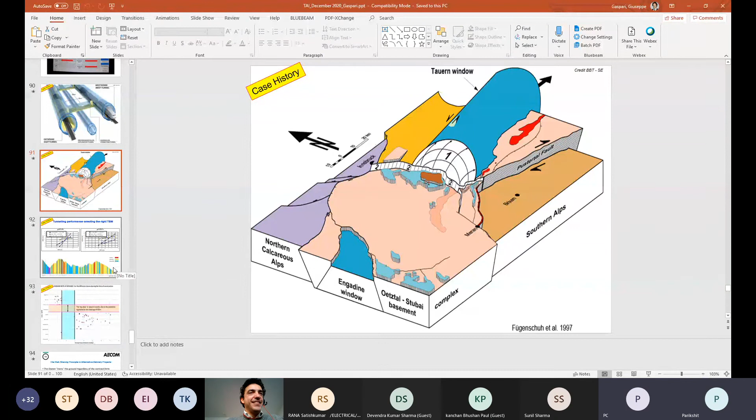Perfect, perfect. Yeah, I just wanted to ask. Thank you, thank you so much. Oh, no problem, sir. There is one more question in the chat box.

Sir, I just want to know whether with the GBR, should we have additional parameters also, like possibility of ingress of water, rock bursting, etc. Should other conditions also be included, or is the GBR good enough?

The GBR always has to include everything which puts your tunneling at risk. So what you mentioned before is definitely something that has to be in the GBR. It has to be. What is not in the GBR is the parameters for you to design. So the GBR includes rock bursting risks, includes boulder risks, includes the swelling potential.

Thank you very much to you guys. Have a good evening. Okay, same to you. Thank you, Mr. Gaspari, thank you so much. Bye-bye, take care. Thank you. Bye-bye, thank you. Bye-bye everybody. Thank you so much.